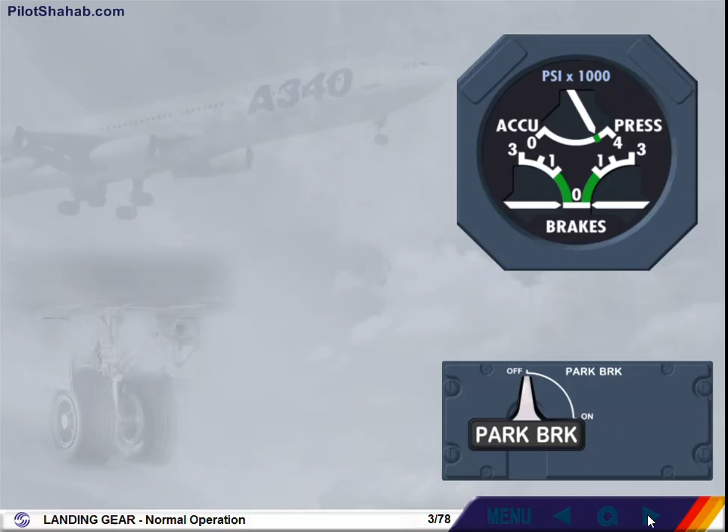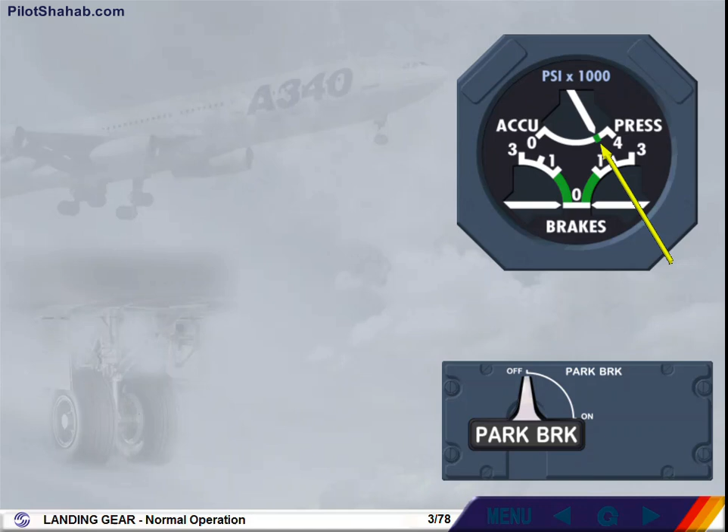Let's assume that the chocks are in place in order to verify the brakes and brake accumulator pressure. The accumulator brake pressure is checked before applying the brakes. The pressure indication should be in the green area. This indicates that the accumulator can hold the parking brake pressure for 12 hours. If the pressure indication is not in the green arc, use the blue hydraulic electrical pump to recharge the brake accumulator.

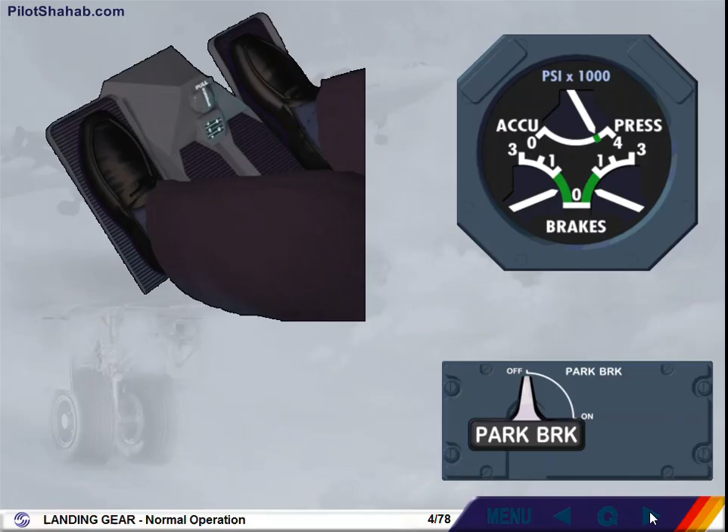Now we must check the efficiency of the alternate braking system. By applying maximum deflection on both pedals, the pressure must build up without delay on both sides, and the maximum pressure must be reached on the brake pressure indicator.

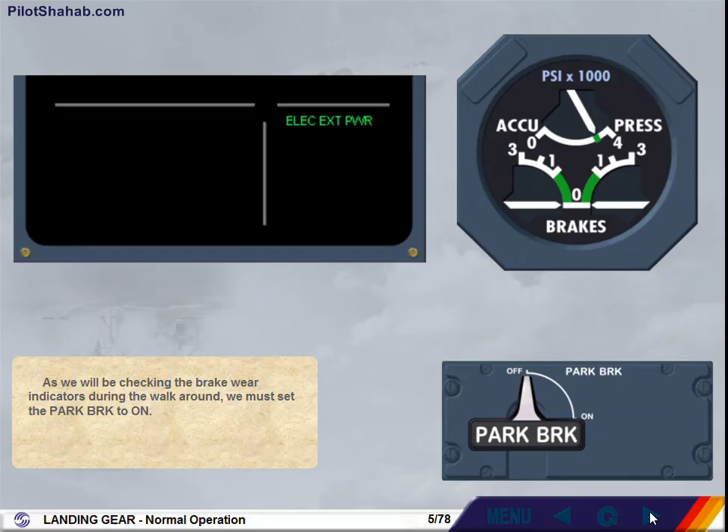As we will be checking the brake wear indicators during the walk-around, we must set the parking brake to on. Set the parking brake to on. On the engine warning display memo section, parking brake in green indicates that the parking brake handle is in the on position.

Notice that the pressure to the main brakes is indicated for each main landing gear. This is blue hydraulic pressure. The parking brake uses the alternate braking system, which is powered by blue hydraulic pressure. Let's now continue with the walk-around.

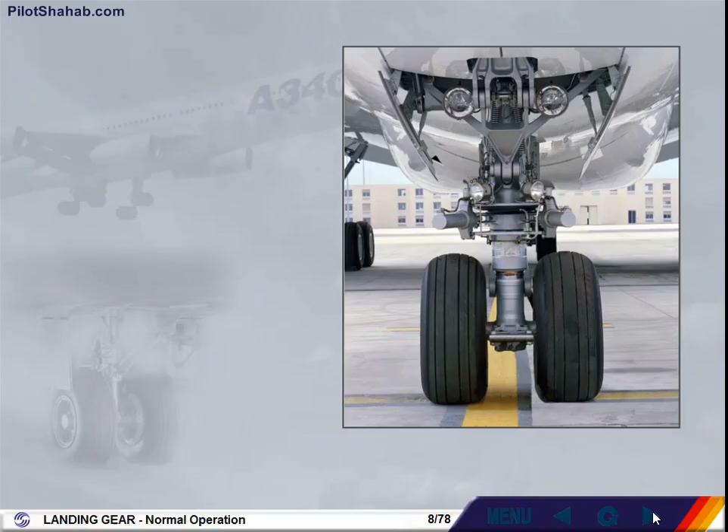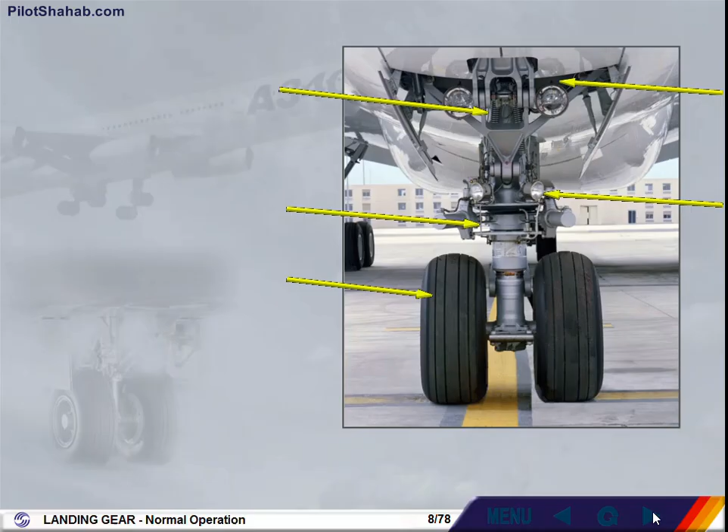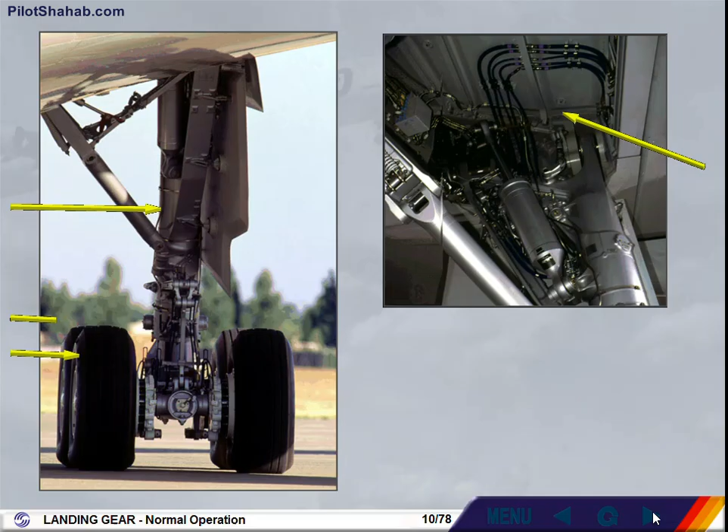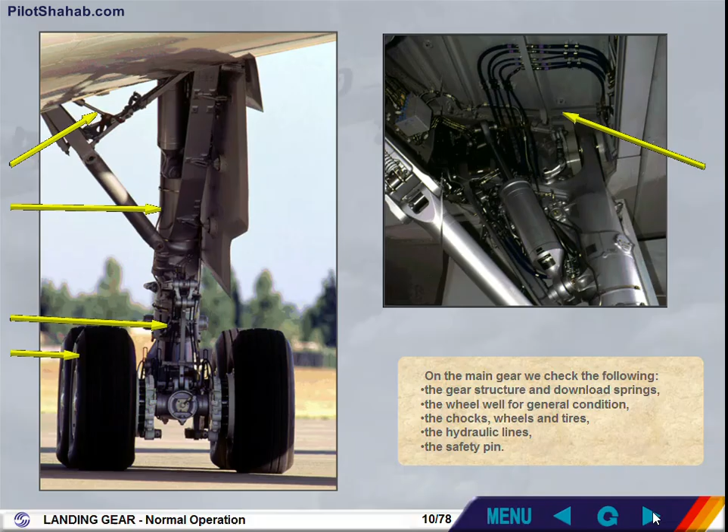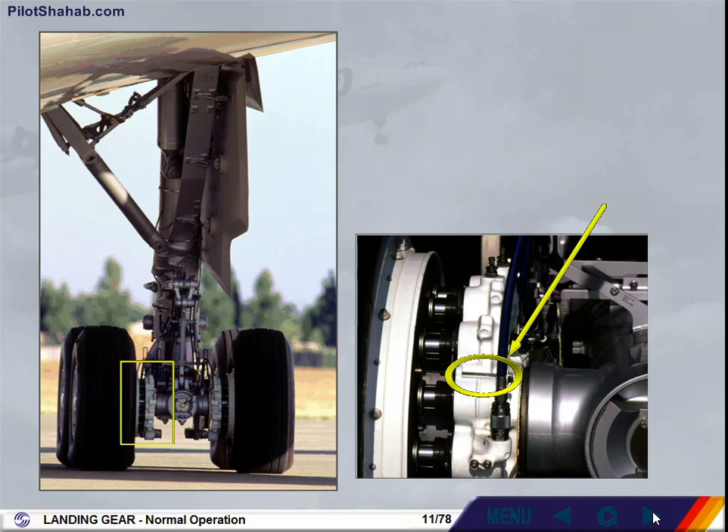On the main gear, we check the following: the gear structure and download springs, the wheel well for general condition, the chocks, wheels and tires, the hydraulic lines, the safety pin. The brake wear indicators indicate the state of the carbon discs. Note, as previously mentioned, the parking brake must be on for an accurate brake wear check.

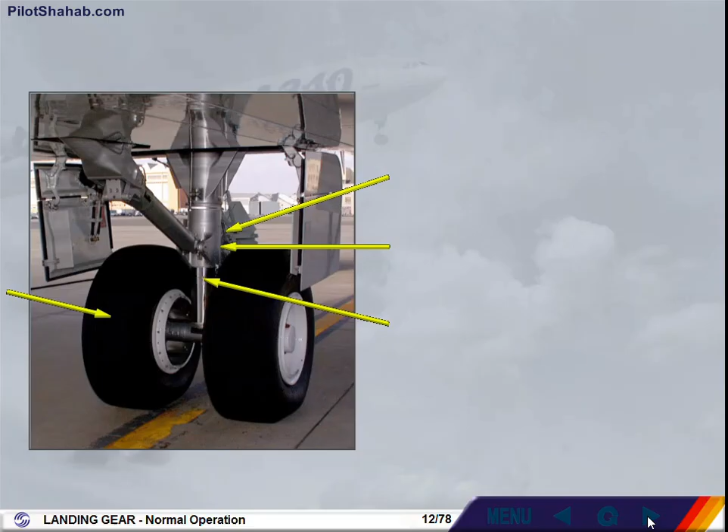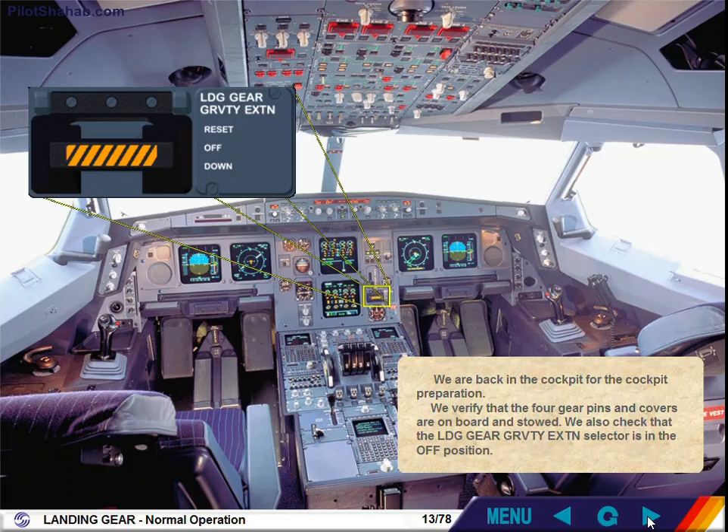On the center gear, we check the following: the gear structure, the shock absorber, the wheels and tires, the hydraulic lines, the safety pin. We are back in the cockpit for the cockpit preparation. We verify that the 4 gear pins and covers are on board and stowed. We also check that the gravity gear extension selector is in the off position. We also check that the anti-skid and nose wheel steering switch is on.

In order to check the brake pressure, set the parking brake handle to off, then to on. Set the parking brake to off. Observe that the brake pressure drops to 0. Set the parking brake to on. Observe that the brake pressure is back to the normal value. Note, if chocks are in place, release the parking brake handle to improve brake cooling.

Before engine start, if no pushback is required, check parking brake handle on and check brake pressure. Caution: if during engine start with parking brake on, the aircraft starts to move due to a parking brake failure, immediately release the parking brake handle to restore the braking pedals.

If a pushback is required, we have to release the parking brake. Caution: do not use brakes during pushback unless required due to an emergency. Set the parking brake to off. The parking brake is off. The brake pressure is back to 0.

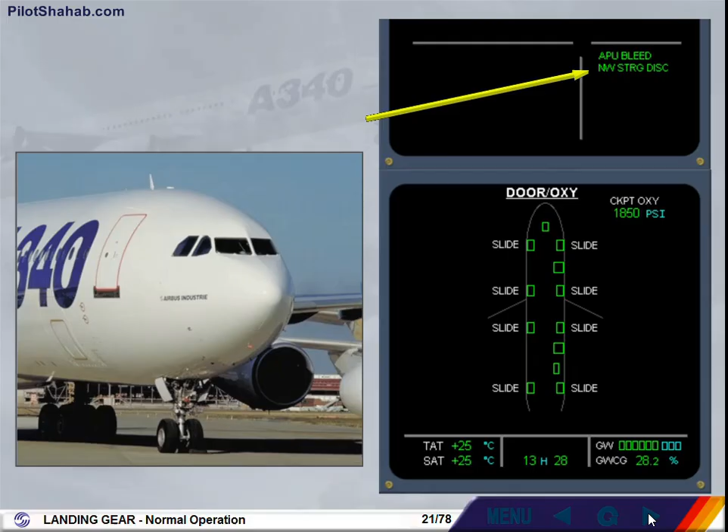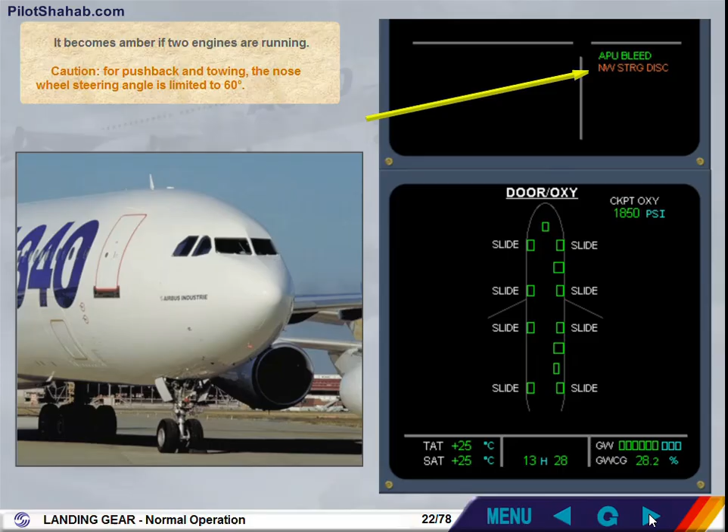During pushback, the nose wheel steering selector, located on the nose wheel, is in the towing position. Nose wheel steering disc memo is displayed in green on the engine and warning display. With this indication, nose wheel steering is not possible from the cockpit. It becomes amber if two engines are running. Caution: for pushback and towing, the nose wheel steering angle is limited to 60 degrees.

The pushback is completed. All the engines are running. We will now check the brakes in order to verify that green pressure has taken over and that blue pressure is at 0 on the brake pressure triple indicator. To initiate the test, we first press the top of the rudder pedals and we remove the parking brake. Remove the parking brake.

On the brake pressure triple indicator, the brake pressure is at 0, indicating that the normal braking system is in use. Note, if brake pedals are quickly depressed, a brief brake pressure indication appears on the brake pressure triple indicator. During taxi, the ECAM wheel page is automatically displayed.

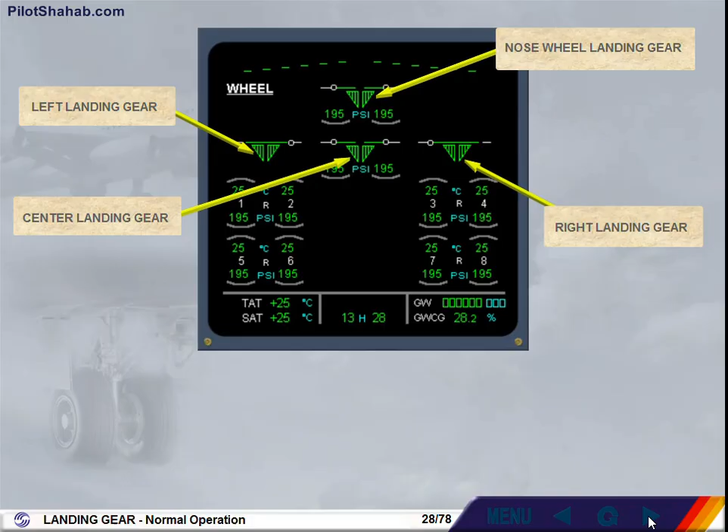Notice the two green triangles for each gear. They indicate that the gear is down and locked. There are two triangles because there are two computers which provide the information for these indications. These computers, called Landing Gear Control and Interface Unit, LGCIU 1 and 2, will be discussed in the abnormal module. The green horizontal lines indicate that the doors are closed in the normal position.

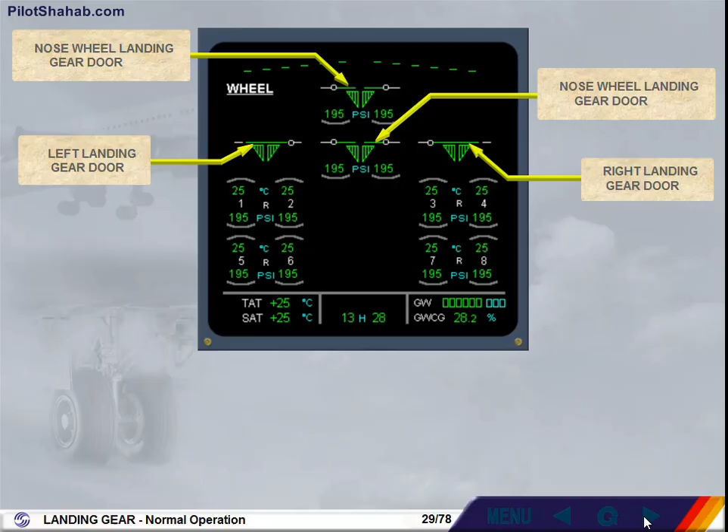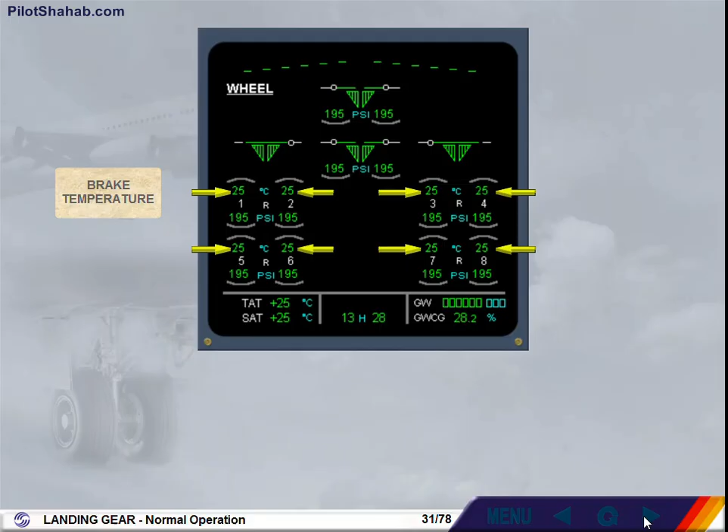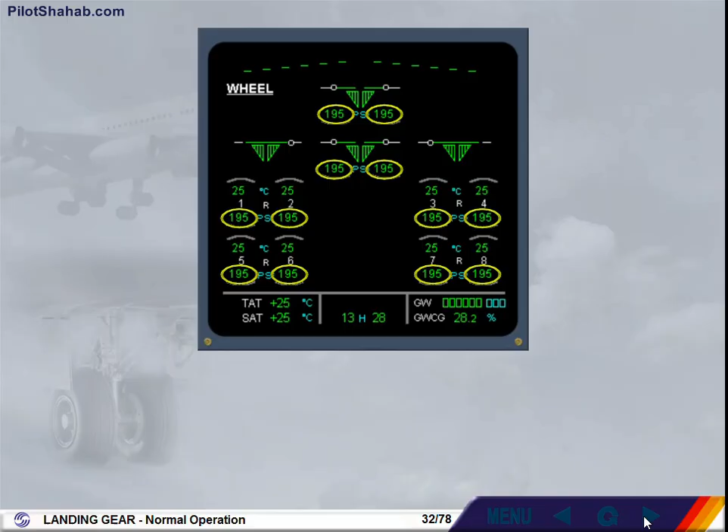Let's have a look at the information displayed below. Brake temperature is displayed in green to indicate that it is normal. Tire pressure is displayed in green to indicate that it is normal. During taxi, the auto brake is armed at max for takeoff. Set the auto brake to max.

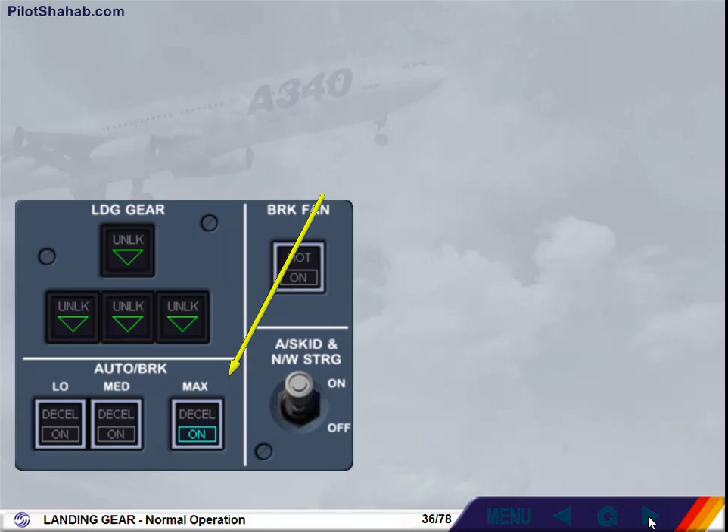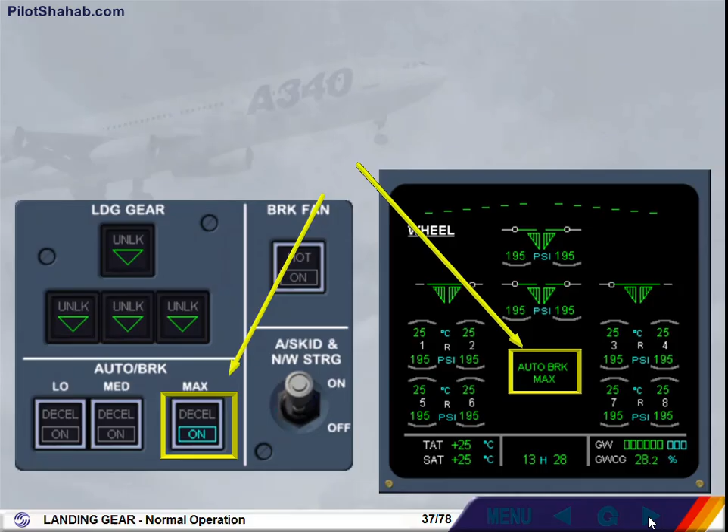The following indications show that the auto brake is armed: On in the selected push button, a message in green on the ECAM wheel page, and on the auto brake line, max changes from blue to green on the takeoff configuration message.

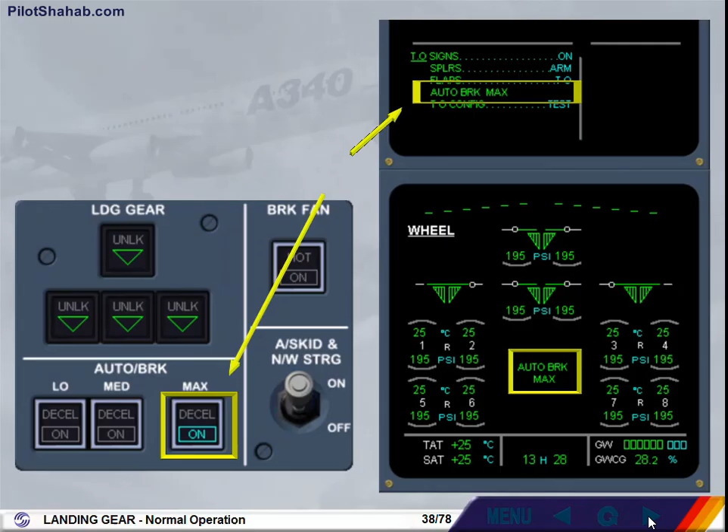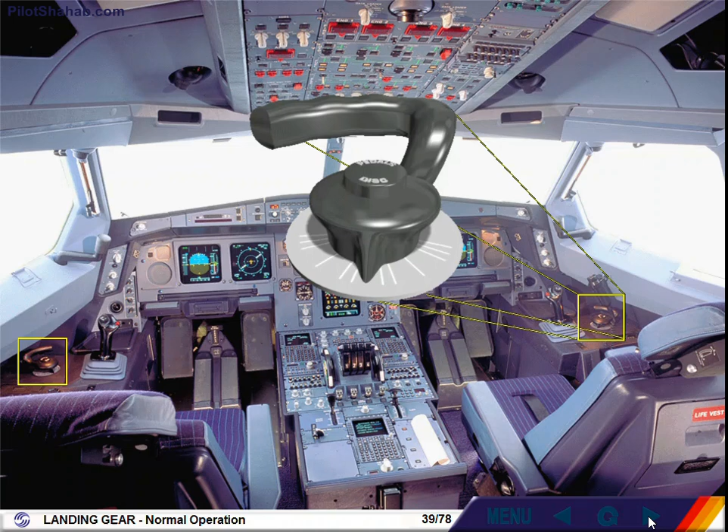During taxi, either steering handwheel can be used to control the direction of the aircraft. The nose wheel steering angle is limited to 65 degrees of left or right deflection. Note, nose wheel steering is self-centered above 100 knots.

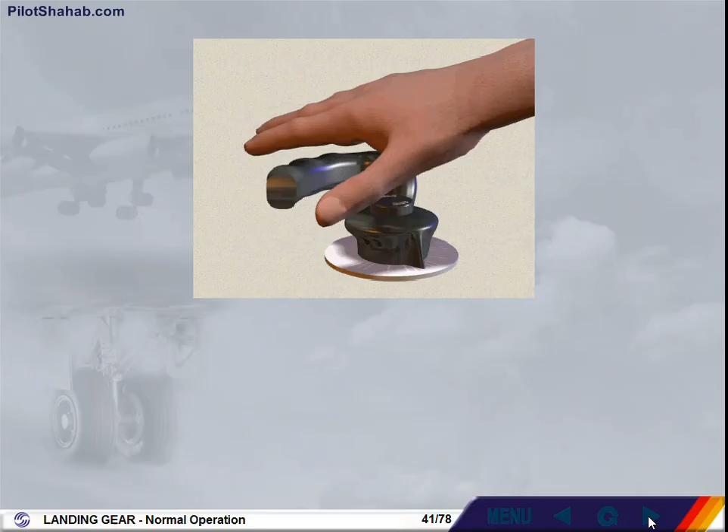While you are taxiing the aircraft for takeoff, you will check the flight controls. To check the rudder, you must press the rudder pedal disconnect switch. This button disconnects the nose wheel steering from the rudder so that you can check full deflection of the rudder pedals versus the indications on the ECAM. You will see and do this in the normal operation module of the flight controls.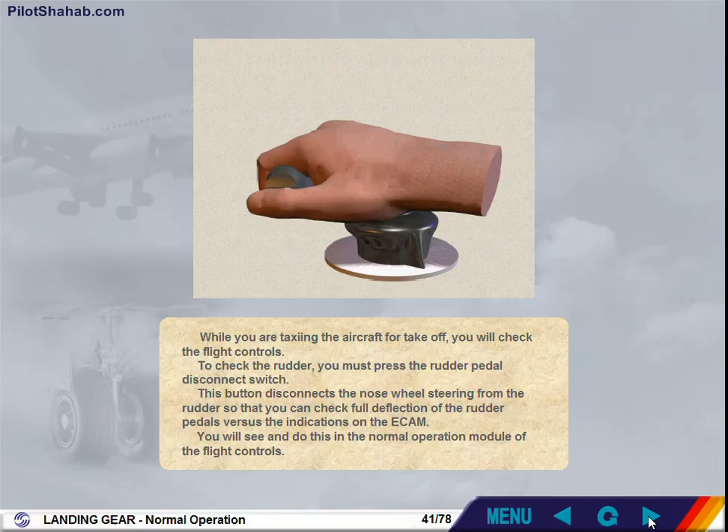During takeoff, the aircraft direction is controlled exclusively using the rudder pedals. The rudder pedals provide up to 6 degrees of right and left deflection at low speed. As the speed increases, this deflection angle decreases progressively until 100 knots, when directional control is 0% nose wheel and 100% rudder.

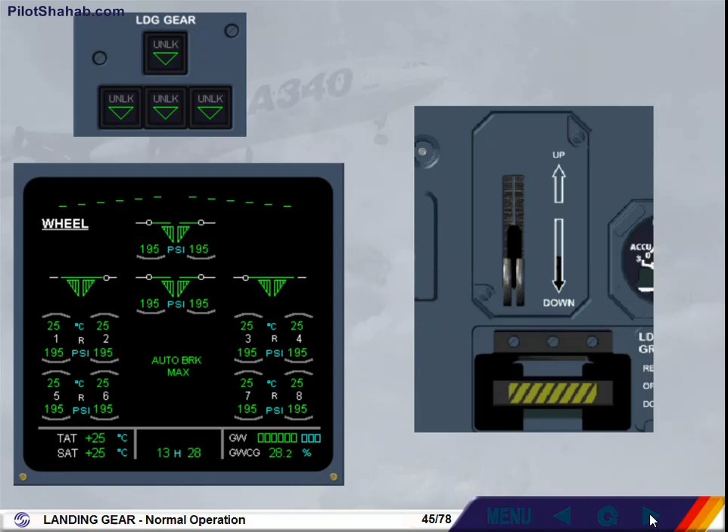We have just completed the takeoff and we are airborne. It is now time to retract the landing gear. Retract the landing gear. Once the landing gear lever is in the up position, the auto braking is automatically disengaged. On disappears on the max push button and auto braking max disappears on the ECAM wheel page. Watch the ECAM and the landing gear lights. We will point out the changes as they occur.

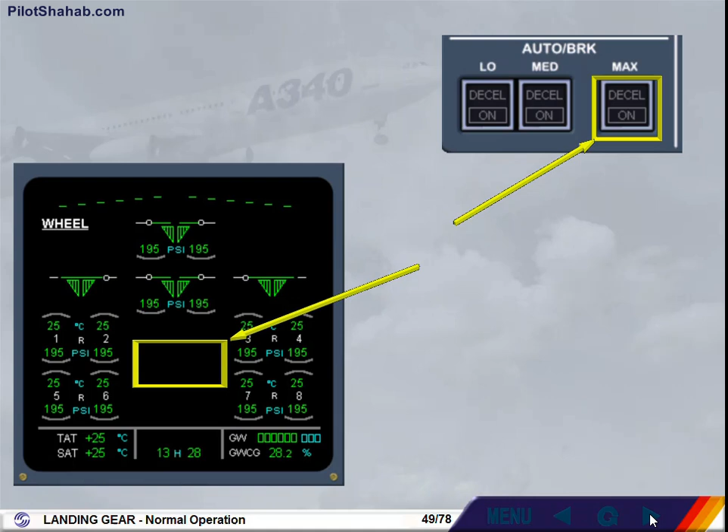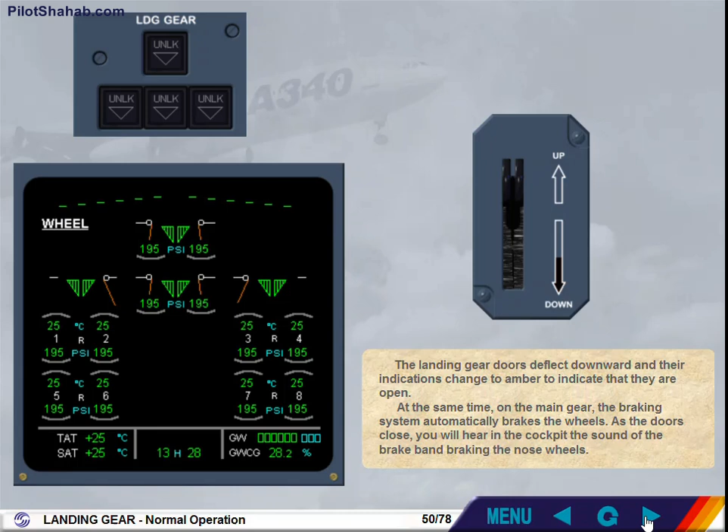The landing gear doors deflect downward and their indications change to amber to indicate that they are open. At the same time, on the main gear, the braking system automatically brakes the wheels. As the doors close, you will hear in the cockpit the sound of the brake band braking the nose wheels. Then the landing gear retracts.

There are two sets of indications which inform the pilot that the landing gear is no longer locked. Red unlock is illuminated in the position indicator lights, and the landing gear indicators become red on the ECAM wheel page. On the ECAM wheel page, the gear is retracted and the doors close. On the landing gear panel, the unlocked indications extinguish.

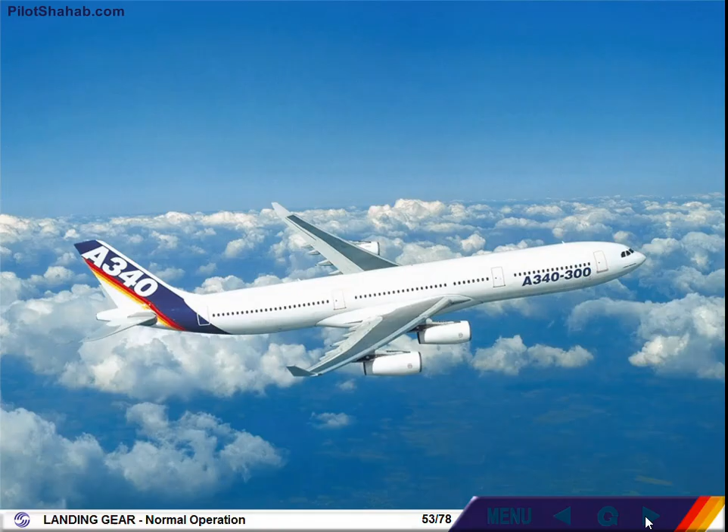The next time we will see indication about the landing gear is during the approach, when we lower the gear. It is now time to extend the landing gear. Watch the indications. Extend the landing gear. As soon as the handle is down and below 15,000 feet, the ECAM wheel page is automatically displayed. On the ECAM wheel page, the landing gear door indications change from green to amber as the doors open. On the landing gear panel, the unlocked indications turn red to indicate that the gear is unlocked.

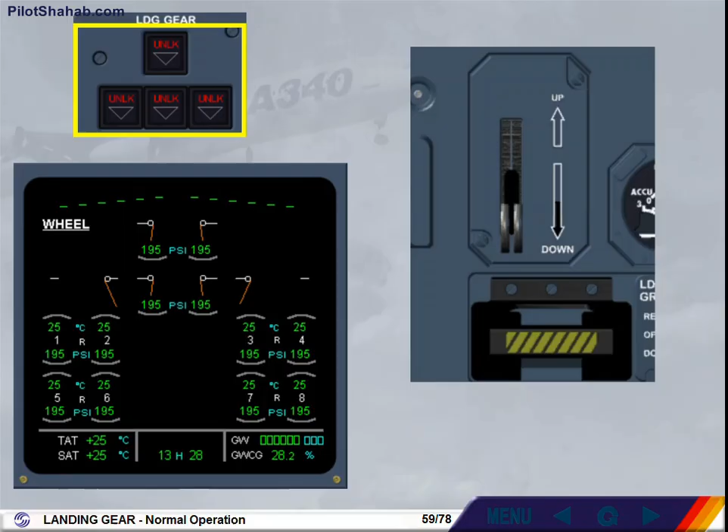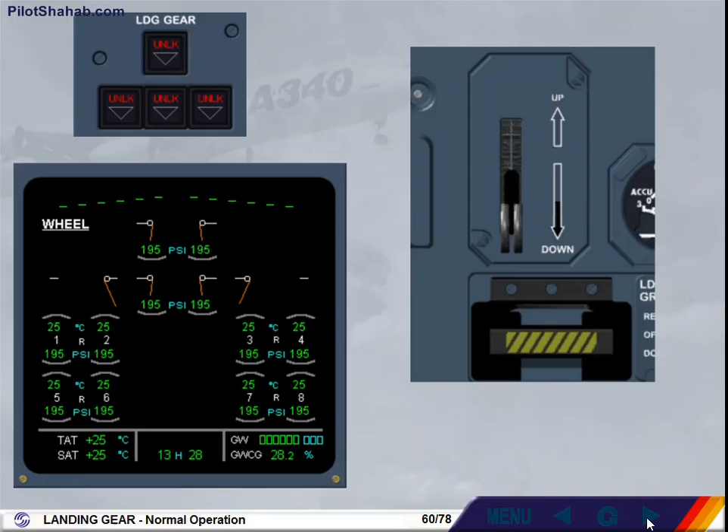The landing gear unlocks and descends. On the ECAM wheel page, the landing gear indications are displayed in red. The landing gear extends. On the ECAM wheel page, the landing gear indications change from red to green and the door indications change from amber to green as the doors close. On the landing gear panel, the unlocked indications extinguish and the landing gear indications become green to indicate that the gear is down and locked.

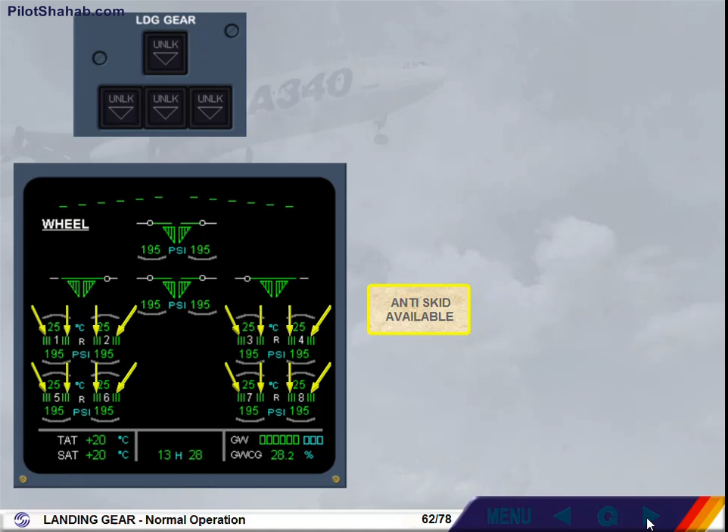These green dashes appear in flight when the landing gear is extended. They remain displayed until touchdown. They will come on and off during braking according to the anti-skid release order. They indicate that the anti-skid is normal and available. Note, the white release indication means released and is a label only.

Airbus recommends the use of the auto braking on short runways, contaminated runways, or when operating in low visibility. The use of auto braking reduces the number of brake applications to only one and thus reduces brake wear. For landing today, we will use the auto braking. Set the auto braking to low.

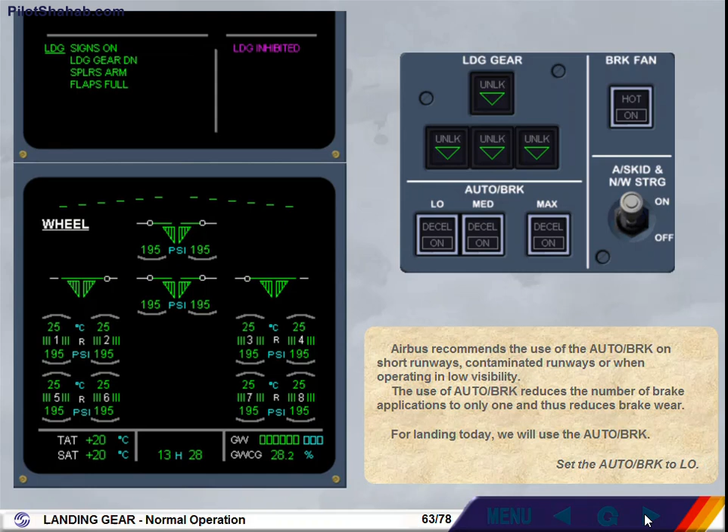The following indications indicate that the auto brake is armed: On in the selected push button, auto brake low in green on the engine warning display, and auto brake low in green on the ECAM wheel page. Note, on the engine warning display, the memo auto brake low only appears below 800 feet above ground level.

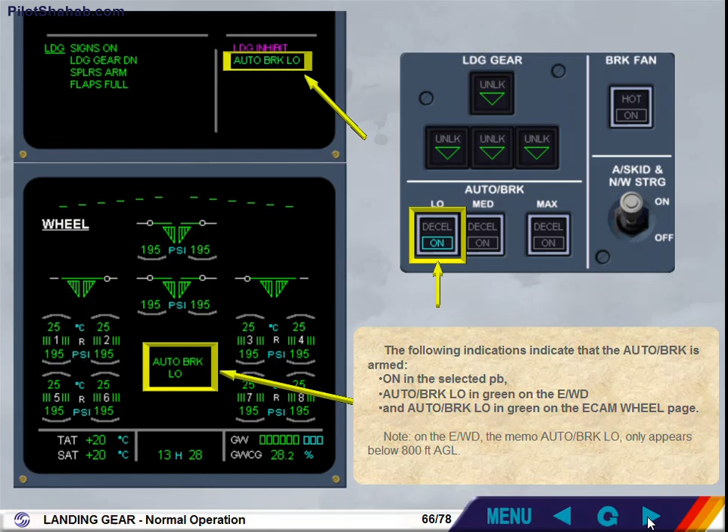We have just touched down. During landing rollout, extension of the ground spoilers triggers the auto brake. The deceleration light illuminates green when the aircraft deceleration is at least 80% of the selected rate.

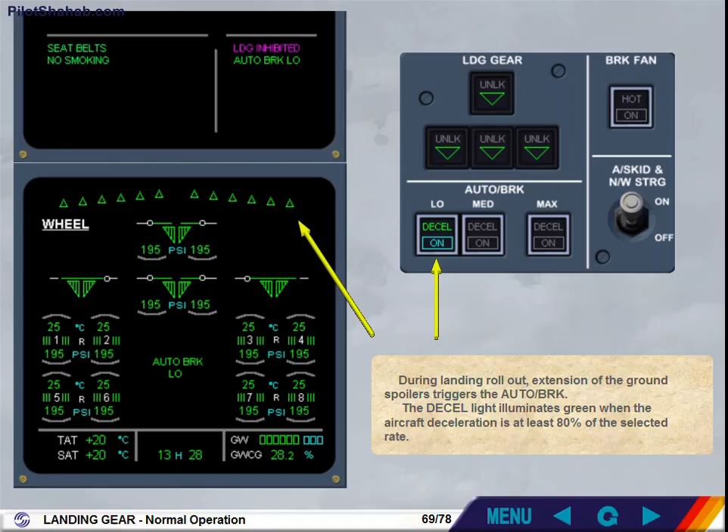Auto brake action after spoiler deflection depends on the rate selected. Low, braking after approximately 1 second. Medium, immediate braking and higher deceleration than in low. Maximum, immediate braking with maximum deceleration rate. This mode is only used for takeoff. On the ECAM wheel page, watch the green dashes. They appear during braking, indicating that the anti-skid is active.

The auto brake can be deselected by either using the corresponding push button on the auto brake panel or by applying sufficient force to one brake pedal in low and medium and to both brake pedals in maximum. Note, auto brake is automatically disarmed in the case of ground spoiler retraction.

On the ECAM wheel page, check the brake temperature for significant differences and high temperatures. A maintenance action is required when the difference between two brakes of the same gear is greater than 150 degrees and the temperature of one brake is above 600 degrees or below 60 degrees.

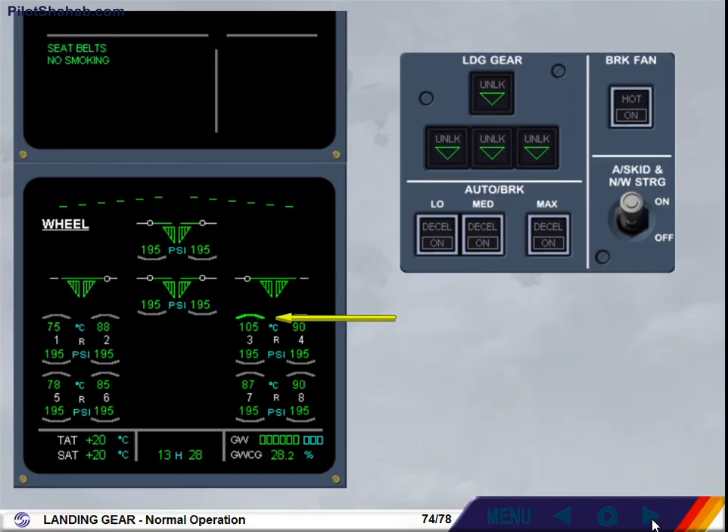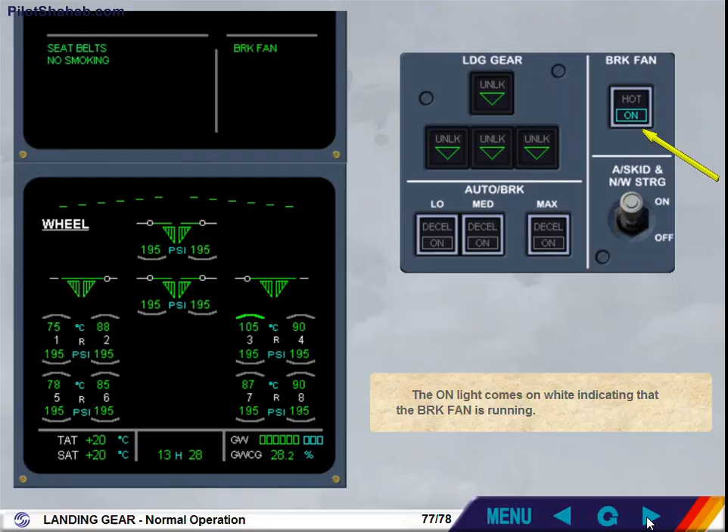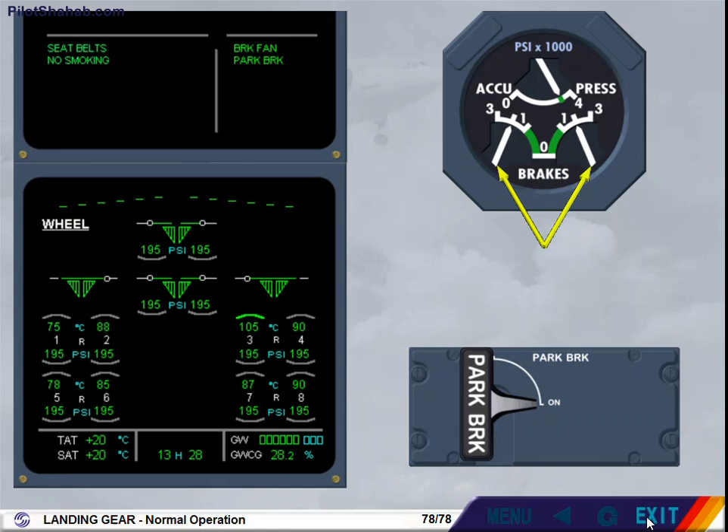Above 100 degrees Celsius, a green arc is displayed over the hottest brake temperature. In this case, the brake fans must be selected on. Switch the brake fan on. The on light comes on white, indicating that the brake fan is running. We have set the parking brake for you. Before releasing the pedals, check the brake pressure indications. Note, as soon as the parking brake is on, braking using the pedal is no longer available.